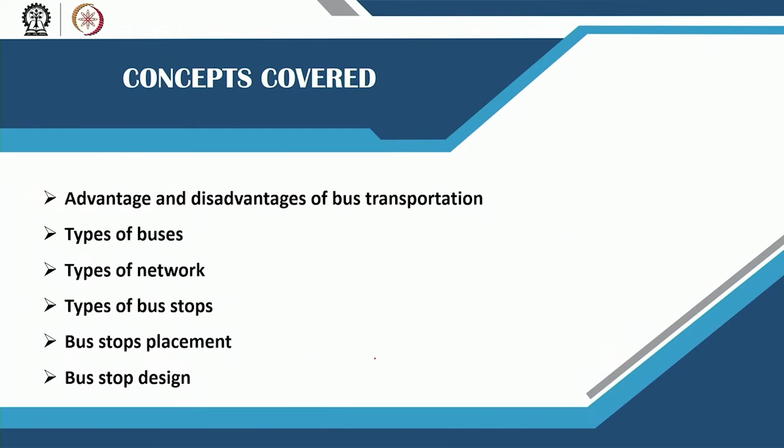In this lecture we are going to cover the different advantages and disadvantages of bus transportation. Then we are going to look at the different types of buses, different types of bus networks, types of bus stops, where they should be placed and how they should be designed. All of this put together would be very helpful in understanding how a bus transportation system should be planned. So, let us get started.

There are some inherent advantages of bus transportation based on previous experiences in different cities of the world as well as in India. The biggest advantage with bus transportation is that they can operate on the existing road system. So you do not need to build new infrastructure or put in any new facilities in order to start a bus system. To operate or expand a bus system, you do not need new roads, no rails, no overhead electric wires, or anything of that sort which may be needed for other types of public transportation. That is the very big advantage that bus transportation has.

Now, there are other advantages as well. The routes can be easily modified. They could be rerouted based on newer developments that are coming up. For example, you have an existing bus route, but a new residential development comes up, you can easily extend that line to that new residential area. You do not need a whole lot of infrastructure to put in to extend it.

The next advantage is that schedules can be varied. You can have multiple schedules. During the day, during the month, during the year, you can have varied schedules as well.

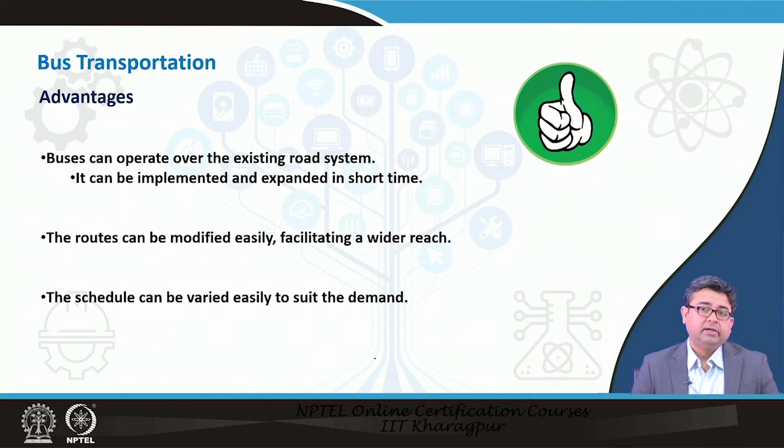Then the other advantage is when the entire fleet is not required to run on a bus route or bus network, you can charter those buses. So, you can utilize your fleet in different manners, so that they are not lying unutilized and not generating any revenue. They can be used for charter services. Also, relatively lower demand usually suffices for dispatching a new bus service. For example, only 20 to 25 passengers per hour is sufficient to justify a new bus, whereas other larger public transportation systems require a greater demand just to justify a new system.

So, bus transportation has these advantages. At the same time, it has several disadvantages as well. One is because they run on existing roads, they are susceptible to delays—not for their own inherent reasons, but due to other modes of transportation running on the roads.

It is also a less visible route network because it runs on existing infrastructure. It gets hidden amongst all the other traffic and is usually not very conspicuous. So, you will see many cities painting their buses a certain color to make them stand out in traffic. Otherwise, they blend in and you cannot easily spot the bus you want to get on.

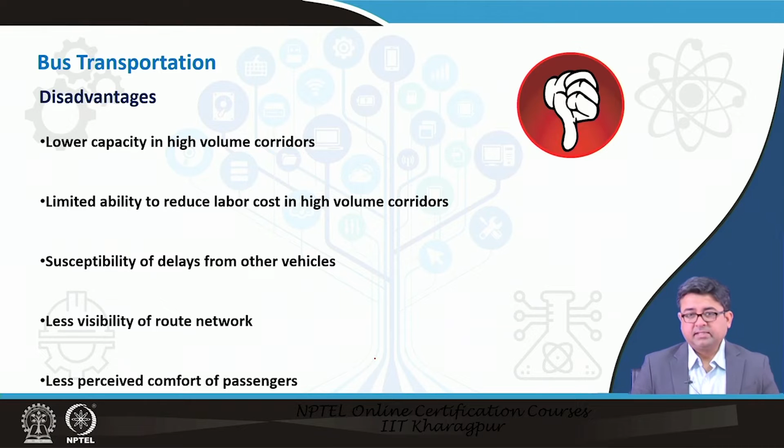Also, for standard buses, if you do not have high capacity buses, they tend to get overcrowded, and the capacity usually cannot be easily added on because the fleet size is almost constant.

So, those were the advantages and disadvantages of bus transportation. Now, you need to know the different types of buses, because for a particular route or network, you need to run only the type of buses that will cater to the demand on that route. You do not need high volume, high capacity buses on routes with very few users. Similarly, you should not have low capacity buses such as mini buses on routes with high demand.

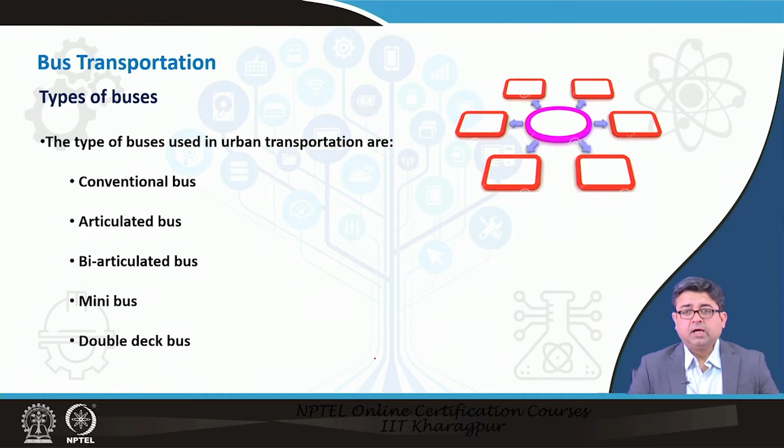Once you are aware of the different types of buses, this will help you plan accordingly. Usually, you will see conventional buses, 40-foot buses, then what are called articulated buses or bi-articulated buses, mini buses, and double decker buses, which are now limited in number in some cities in India and also across the world.

This gives you an example of how many passengers can travel sitting and standing in each of these buses. So, you would see a conventional bus has anywhere between 35 to 54 seats. It can accommodate, or it should accommodate, 19 to 40 standing people. So, a total of 45 to 94 people can be accommodated in a standard bus. So, this is the general practice that should be followed.

Now, it is not to say that buses in India do not carry more than this or less than this, but this is what we generally recommend, or is generally noted when it comes to different capacities for different buses. This takes into account the revenues that are generated. This takes into account the comfort of the people that are riding those buses and some other factors. So, this is a general guideline.

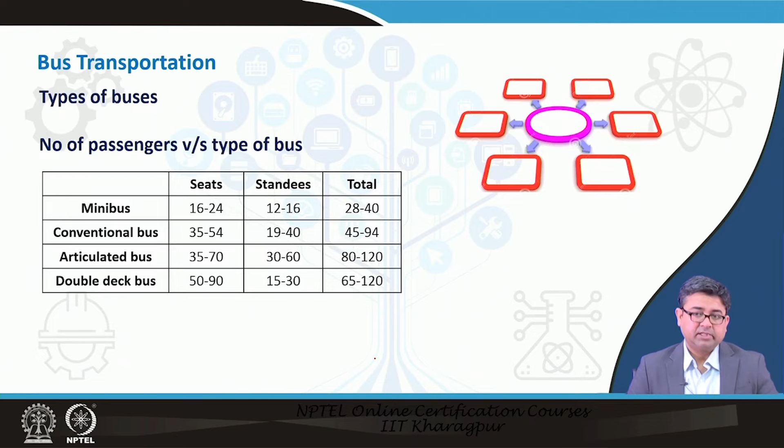Now, you see articulated buses can take many more people. Similarly, double decker buses can accommodate many more people, but they have their own issues, such as articulated buses require a very large turning radius. So, they may not be able to get into the narrower urban streets in your residential areas, and so forth.

Here are some pictures of different types of buses that I was discussing. A conventional bus, double decker bus, articulated and bi-articulated buses are something new that are coming up in some of the cities which are heavily investing in improving their bus transportation systems.

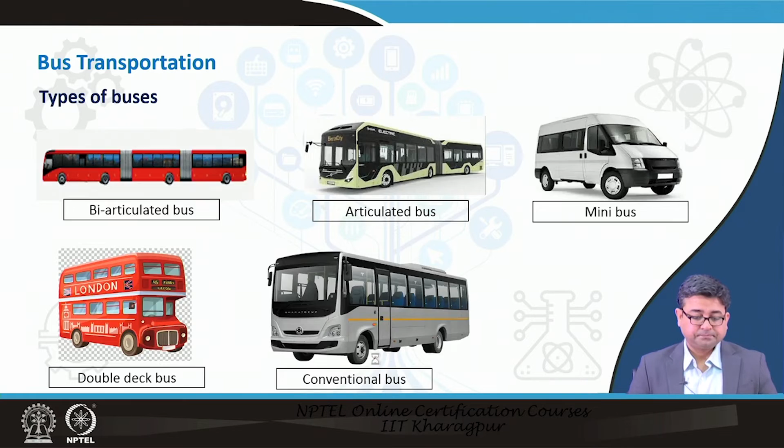After you are aware of the types of buses, now you should be learning more about the different types of bus networks. So, when you visit a new city the next time, try to get hold of a public transportation bus network map, or maybe even look up on the internet to see how the public transportation network is. You would see that there are different types of patterns of these bus transportation systems.

Listed here are a few of them that are mostly used worldwide: radial and ring patterns, grid type network, radial crisscross, trunk line with feeders, timed transfer networks, branches and loops, and through routing. There is enough material in the textbooks that will tell you about these different types of route networks. The most common ones are the trunk line with feeders, branches and loops, and the grid network. Radial and ring pattern is also fairly popular across different cities.

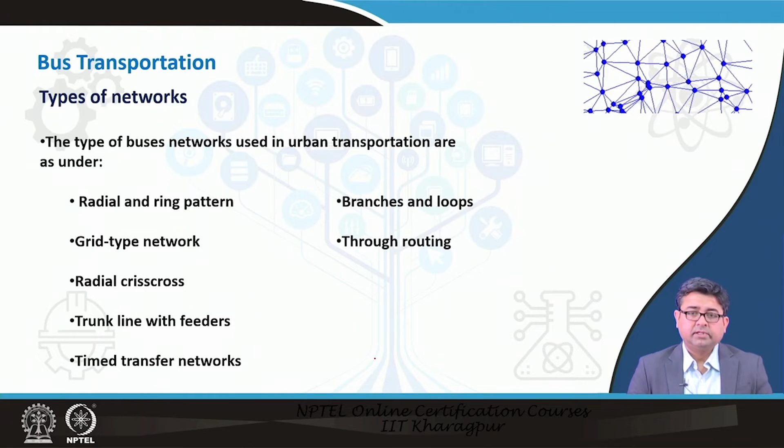So, if we look at some of them in detail, you would see the radial and ring pattern looks like this. It has a radial pattern which radiates out of the central business district. All of the different routes radiate out of the central business district into the different suburban areas, but at the same time it is overlaid by a ring network as well.

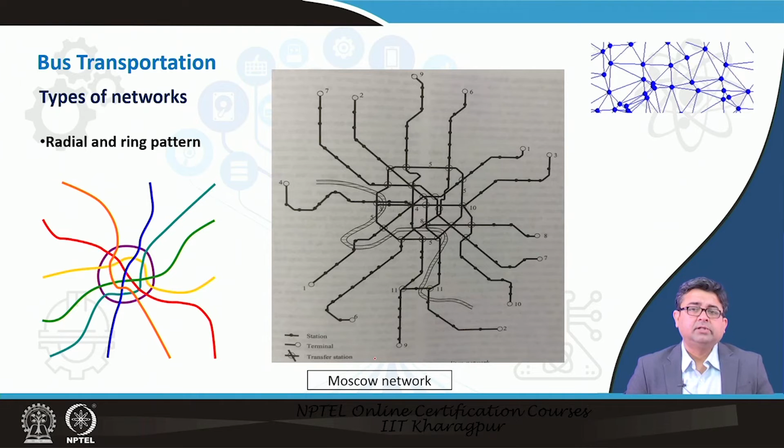So, why is this usually done? Because now if you want to travel from the central business district on the blue route, but your destination is eventually on the green route, if the ring route is not there, there is no connection between the blue route and the green route, except for going all the way into the CBD and then taking the green route again. So, this ring pattern allows you to transfer between these different routes or lines. That is a pattern observed in many cities. An example shown here is the Moscow city network.

Grid network is something that many of you would also notice in cities that have well planned road networks, as in road networks that are square or rectangular in pattern. If you have such grid patterns, it is very easy to reach your destinations. The block sizes usually are very small. So, once you get off your bus, your destination is not very far, or your origin is very close to your bus stop at the home end.

However, these are mostly restricted around the CBD areas of most cities now. The CBD areas tend to have a grid road pattern, and hence the bus routes in the CBD areas also tend to have a grid pattern of network. Shown here as an example is the Gandhinagar network.

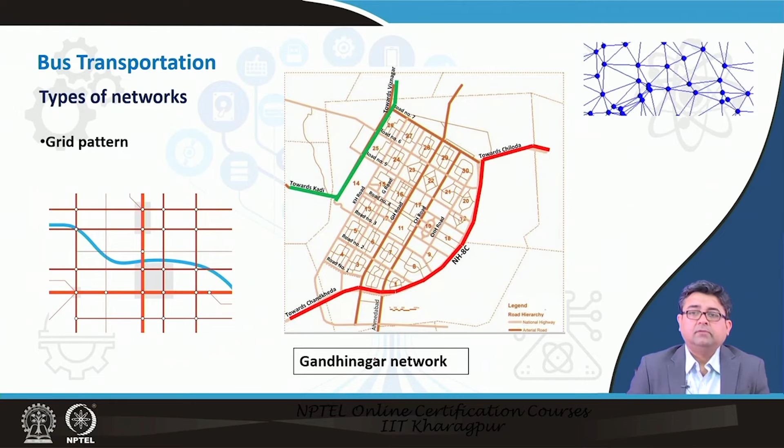Moving ahead, this is something that is popular worldwide, but is now catching up in India, especially when there are BRTS corridors, bus rapid transit system corridors. An example is the Indore city bus rapid transit corridor. The red line is the trunk or main line that runs east west in this case, but can run north south as well. That is the main route, and then there are different feeder routes that feed into this main line.

Here you would see different green, orange, brown lines that are feeding to the trunk line. This type of network usually is seen when there is a main BRTS system, and then there are different feeder routes that feed into that system.

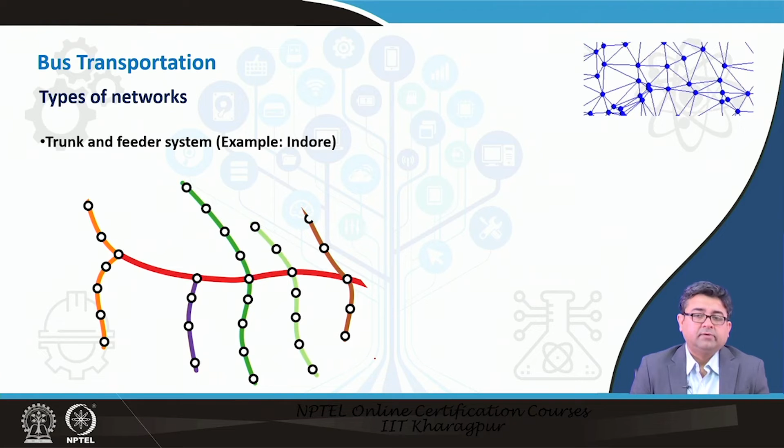The next theme to understand is the type of bus stops. So, now we have already looked at what are the different types of buses and what are the different types of bus networks. The next category is bus stops. So, you would think, why do you want to categorize different bus stops?

You would want to categorize them based on how many people get on board or get off the bus at different types of stops. So, once you know if a particular stop has very heavy boarding during the morning times and very heavy deboarding during the evening times, then you would know that that is maybe a major residential area where people in the morning are going to work and in the evening are coming back. So, you would have them as regular stops or sometimes premium stops even.

So, you would see that the bus stop categories are divided into different categories, generally based on the location where they are. So, the first ones are called minimum boarding points, which have very little demand. They are maybe suburban locations which during the daytime have very low demand, but may have a little bit of demand during peak and off peak times. So, those are minimum boarding points, and why you want to classify them, we will get to it a little bit later.

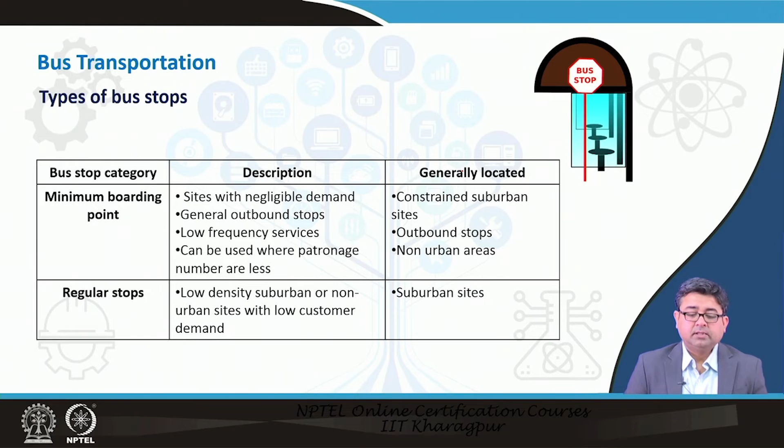Regular stops are regular suburban sites that we discussed just now, which have morning peaks and evening peaks, and usually very little demand in the midday. Intermediate points are maybe suburban sites near some attraction. So, maybe there is a park and ride lot, or there is some kind of a large shopping center in the suburban area. Those are classified as intermediate stops, whereas finally premium stops are the stops near major attractors: big office complexes, big entertainment places, and so on and so forth.

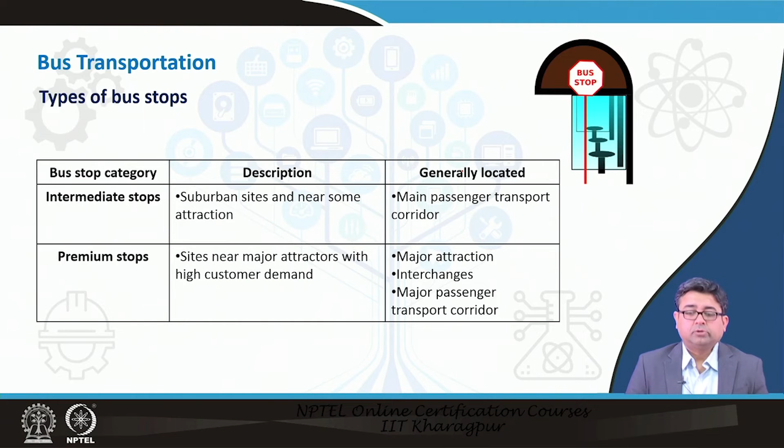Now, after knowing what are the different categories of bus stops, one also has to know where to place these bus stops on the road network. That plays a very important role because these are the locations along the road network where the bus is going to stop to pick up and drop off passengers. So, the location has to be very ideal, otherwise it may not be able to serve the community. At the same time, the location should not cause much delay to the other traffic modes that are plying on the street.

So, here is an example of where a bus stop can be placed. If you look at this street network, this is an intersection, and it is shown here that the bus stop is on the far side of this intersection. So, if that is the intersection and the bus stop is after the intersection, immediately after passing through an intersection, then it is called a far side bus stop, whereas a near side bus stop is just the opposite.

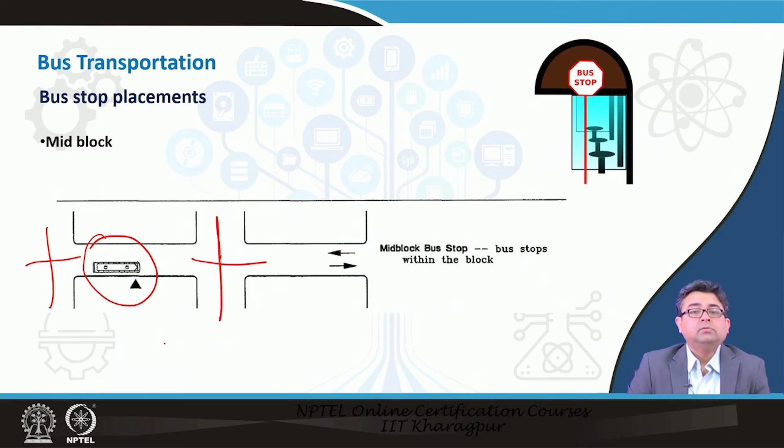So, if this is the intersection and the bus stop is before the intersection, then it is called a near side bus stop. And the third category is a mid block bus stop. A mid block bus stop is neither close to this intersection nor this intersection; it is somewhere in the middle of this block. Now that we have these three different types of bus stop locations, one also has to understand when to locate these bus stops at these three different locations.

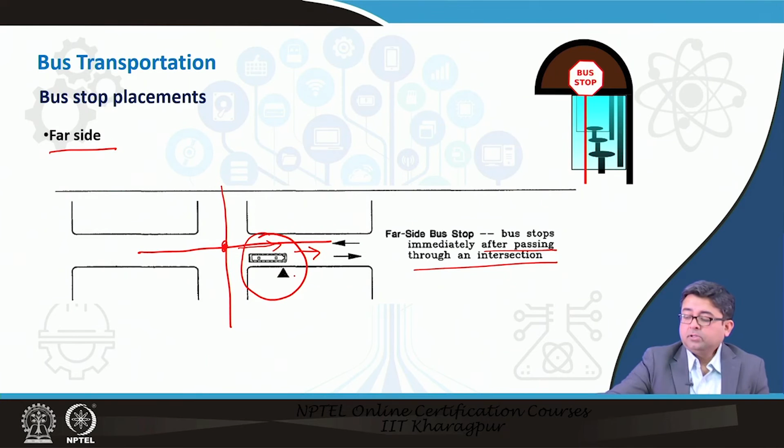So, usually you would see that the preferred location of any bus stop is on the far side. There are different situations when bus stops are preferred to be placed on the far side, such as any signalized intersection where the bus can stop on the travel lane. So, as you would see here in the previous slides, the bus is stopping on the travel lane. So, there is other traffic going on the same lane, and the bus is also stopped on the same lane. Other situations are given here.

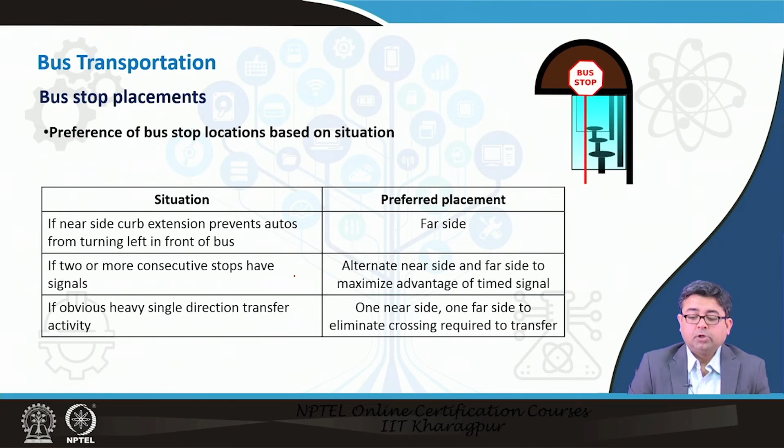Very rarely, somebody would want to place a bus stop in the mid block, and that would be if the blocks are too long. So, if the distance between successive intersections is too long, then what you would ideally want to do is not have those bus stops at the intersection, but somewhere in the middle of the block, so that you are capturing all the possible riders that are in the middle of the block. Otherwise, it may be too long a distance for them to walk from their origin to this intersection.

Also, the last item listed here is the transit center, which is off street, meaning that it should not be on the travel lanes; it should have a different structure associated with it. So, that is where the terminal stations or the multimodal transit centers are, where you change from a bus to maybe a train, or from an urban bus to a regional bus network. So, those are called transit centers, and they usually have their own structures which are off the street.

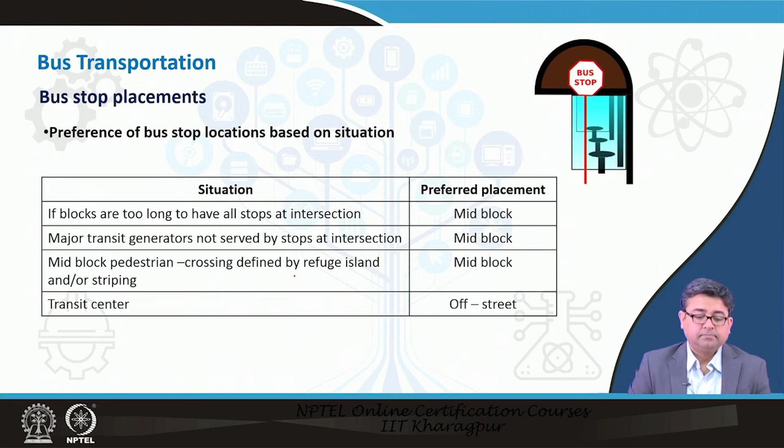Now, here is a typical bus stop spacing scenario. So, now you know where the bus stops physically can be located, either far side, near side, or mid block. And now it is important also to know what is the spacing between two bus stops. So, you would see that in the central core area or the CBD, the spacing is usually very less, because there are a lot of attraction points and people may want to get on and get off at several locations.

So, your bus stops are usually spaced very close to each other when compared to suburban or rural areas, where you can have bus stops very distantly spaced from each other.

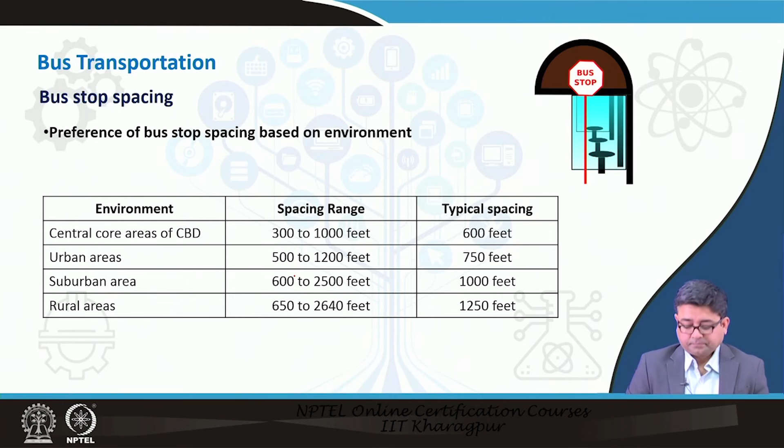Next, we come to the different types of bus stop designs. So, now that you know where they can be located, it is also essential to understand how they have to be designed. So, let us look at the most common type of bus stop design that we have also looked at while looking at the bus stop locations, which is the curbside stop.

So, a curbside stop, this is a far side, if you remember, this is a far side bus stop which is after the intersection, and it is also the curbside, meaning it is right next to the curb on the road. So, it does not have any special infrastructure requirement, it just stops right next to the curb and people get on and get off from the bus.

Whereas, in certain other situations you may have something called a bus bay. So, here are your regular traffic lanes, but then the bus would get into this special lane which is called the bus bay, and the bus stop is located in this bus bay.

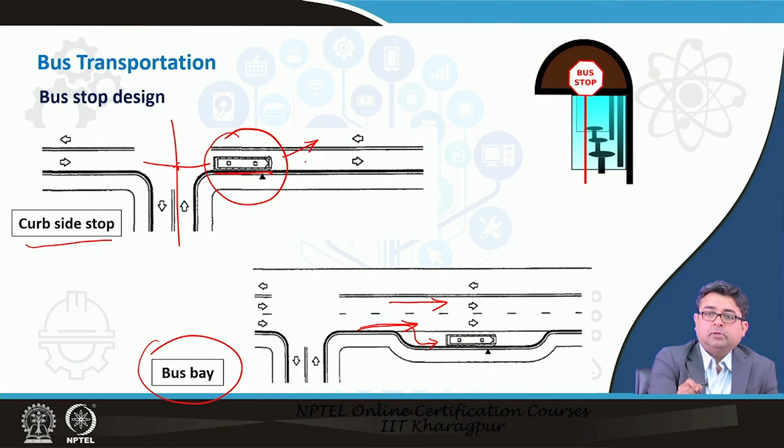So, this is ideally done or required when there is a location that has a large number of boardings and alightings. So, when the dwell time of the bus is very high, you do not want it to be obstructing other kinds of traffic, which it would do if the stop was on a curbside. Now, it has its own special bus bay, and so there is no obstruction to the ongoing traffic.

The next one is another variety of the bus bay lane. This is called an open bus bay. So, you would see that actually right after the intersection the bus bay arrives. So, the arriving bus directly gets into the open bus bay.

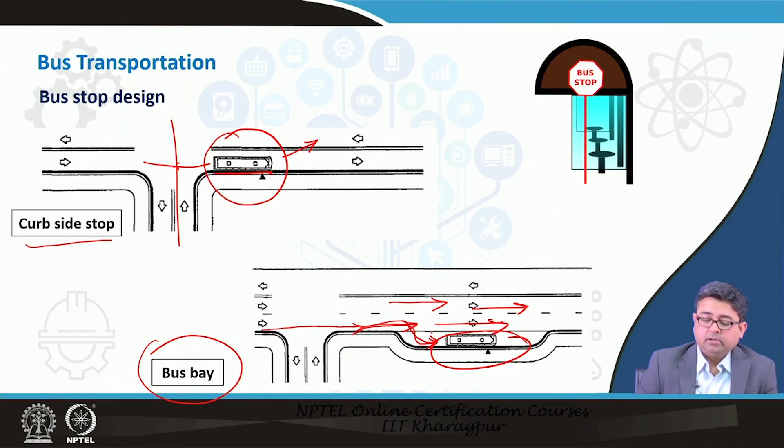If you look at a typical one, here the buses go past the intersection in the travel lane, and then the bus bay is a little bit later on, whereas in an open bus bay, the bus can directly get into the bus bay. There are different advantages and disadvantages of this, and when they should be designed is all available in the textbook, but first let us at least look into what are the different types.

Then there is a design that is called a queue jumper bus bay. So, what happens here is, if there is a dedicated right turn lane here, I mean these diagrams are shown keeping in mind the western driving conditions where people drive on the right hand side and they have free right turn lanes. So, in our case it would be left turn lanes.

So, if there is a free right turn lane, what usually is allowed is the buses are allowed to take the right turn lane, but jump the queue and go straight. Otherwise they would be queued up here in the travel lanes, waiting for this queue to be dissipated before they could go ahead. So, in order to avoid them being queued up on the travel lanes, they are allowed to take this right turn only lane, but jump the queue and come directly into the open bus bay. So, that is the example of a queue jumper bus bay.

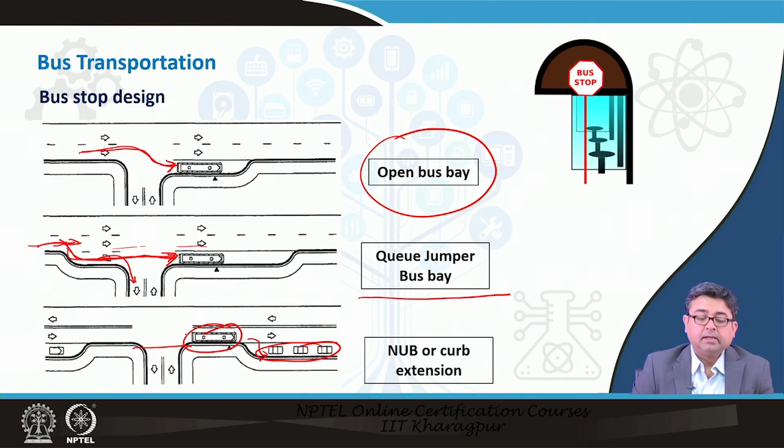Similarly, the last one is a nub or a curb extension. What happens here is, usually the curb is supposed to be here, however, it is kind of extended so that the parked vehicles can be on this side, the parking can be on this side, and the bus stop can be here. So, these are pretty well illustrated, easy to understand, and explained in your textbook.

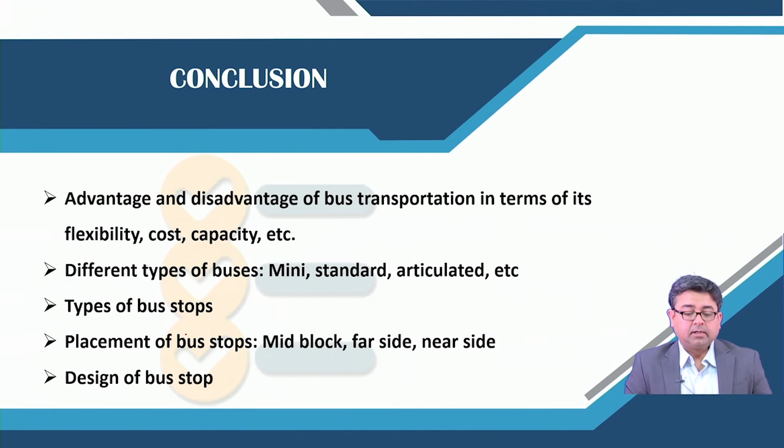So, in conclusion, what we looked at today was all the advantages and disadvantages of bus transportation in terms of flexibility, cost and capacity. We introduced you to the different types of buses, the different types of bus stops, the placement of bus stops, as well as the design of bus stops. So, all of these 4 or 5 elements together are going to help you to plan for a bus network in your city and make it more efficient.